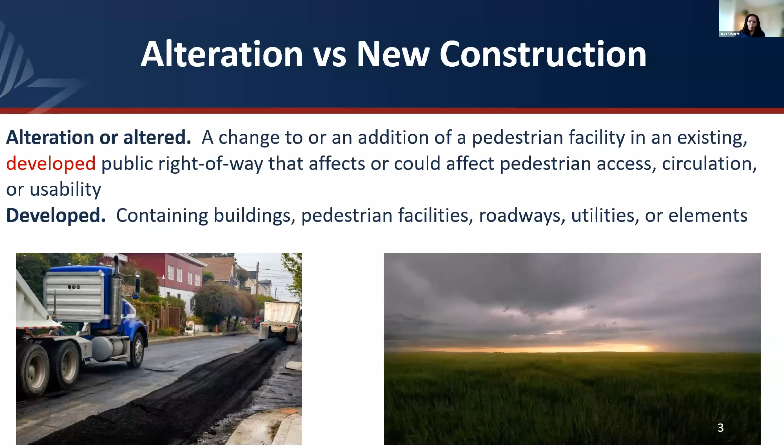Another change you'll notice is in the provision we used to term equivalent facilitation. Equivalent facilitation is still allowed for Title II or Title III entities, but we split it into two sub-provisions. The reason is it depends on whether you're doing work for an ADA covered facility, like towns, counties, and states, which are Title II agencies covered under the Americans with Disabilities Act, versus work on a federal site, which is covered by the Architectural Barriers Act. These two sub-provisions point out what you need to do if you must deviate from these requirements. Under the ADA, use of alternative designs, products, or technologies that result in substantially equivalent or greater accessibility and usability than the proposed guidelines is permitted.

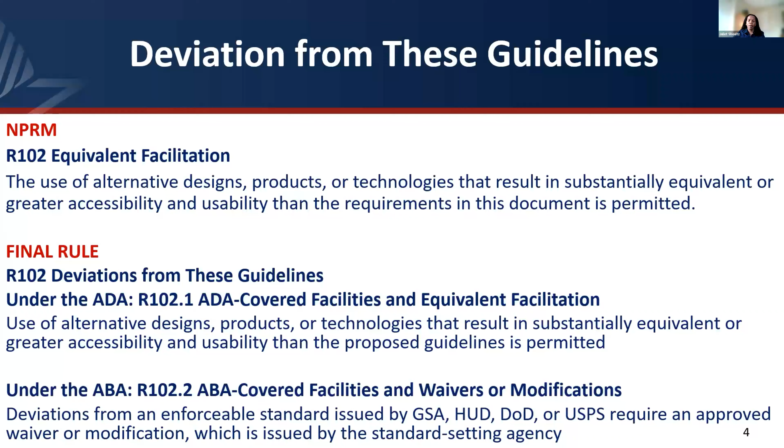We don't have a process in place for you to identify why you are deviating from these guidelines. Now, if you're working at a facility, say a military base under the Architectural Barriers Act, and you needed to deviate, you'd need to get an approved waiver or modification issued by the standard setting agency. So if you're working on a military base, for example, you'd have to reach out to the Department of Defense to get a waiver or modification to deviate from the guidelines. That's really the difference—deviation is still recognized, and sometimes you might have to do that, but the process works differently.

The other key change is that we got rid of right-of-way availability as an example of existing physical constraints. In the NPRM, that provision had a listing of examples of physical constraints, and right-of-way availability was one of them. But we found that was really confusing because right-of-way availability was interpreted in multiple different ways by users—one being whether there's no land at all, like a tight urban space where the sidewalk abuts the building and can't be widened, or whether it means you need to get an easement or something along those lines. Because on a lot of projects you can get an easement or acquire the right-of-way, we decided to remove that as an example, so each project can be assessed based on its own parameters and availability.

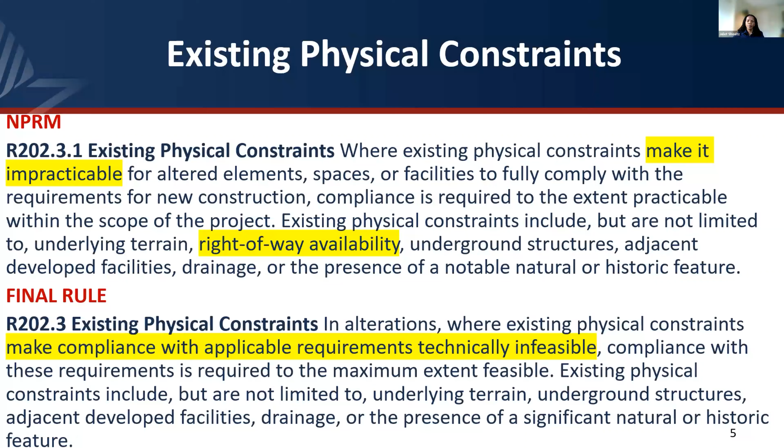So now we're going to go into some of the more technical requirements. In R202.2, we state that where pedestrian facilities are altered, they shall be connected by a pedestrian access route complying with R302. R302 is our technical requirements for a pedestrian access route, or PAR.

A transition segment may also be used to make this connection. An example of this is if you have a project where you're just redoing the curb ramp and landing, but not the rest of the sidewalk. This requires that when you redo that curb ramp and landing, you tie into the existing, which may not be compliant.

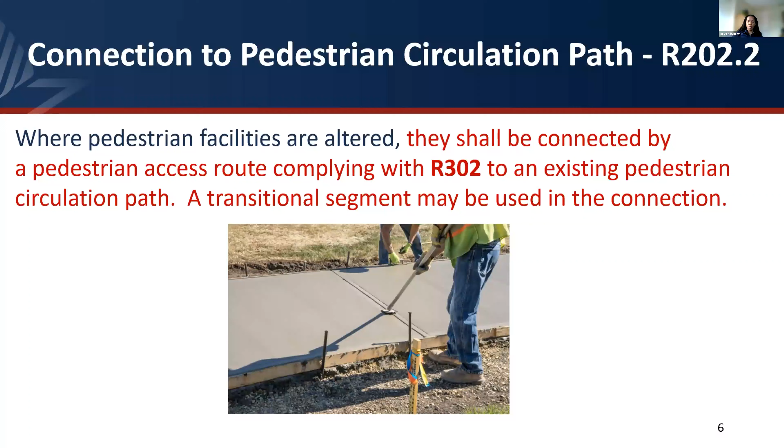But you tie in with a pedestrian access route or a transition segment. Another thing you'll notice in the final rule is we used to have transitional segment as a provision. What we've done now is we've defined transitional segment, and then we use the language within the rule text. But the concept of a transitional segment has not changed.

I mentioned R302 includes the technical requirements for a pedestrian access route, or PAR. So we'll look at some of them. I won't address all of them, but I just want to point out the ones where we revised for clarity or we changed the requirement substantively.

First thing is continuous clear width. This requirement didn't change, but we just wanted to make clear that when we say 48 inches minimum, that excludes the width of any curb. So you can see in this image, I'm showing the width of the pedestrian access route, but that doesn't include the width of the curb. So you want to make sure you have 48 inches exclusive of that curb width.

The 48 inches is the minimum pedestrian access route width, unless you are in medians and pedestrian refuge islands, where we require 60 inches minimum. Where you have shared use paths crossing medians and pedestrian refuge islands, the requirement is 60 inches minimum, or at least as wide as the crosswalk, whichever is greater. Keep in mind, on a shared use path, PROWAG still doesn't tell you how wide your shared use path must be, but the entire width of pedestrian circulation must be accessible.

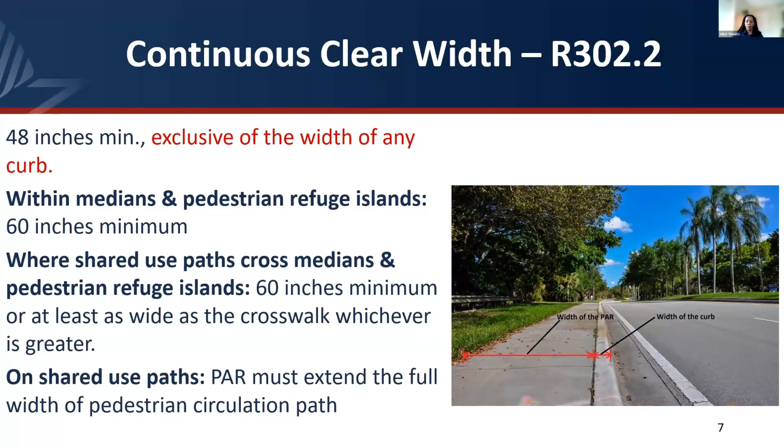The grade of the pedestrian access route within the highway right-of-way - that requirement hasn't changed, but we wanted to clarify what that means. On this picture, I'm showing a roadway that has a pretty steep grade, probably well over 5%. What we are requiring, consistent with the draft rule, is that the sidewalk within that right-of-way can match the grade of the road.

What we do clarify is that just because that sidewalk happens to exceed 5%, that does not make it a ramp requiring the ramp requirements - handrail, edge protection, and all that. So the sidewalk adjacent to a steep roadway is allowed to exceed 5%, but that does not then make it a ramp.

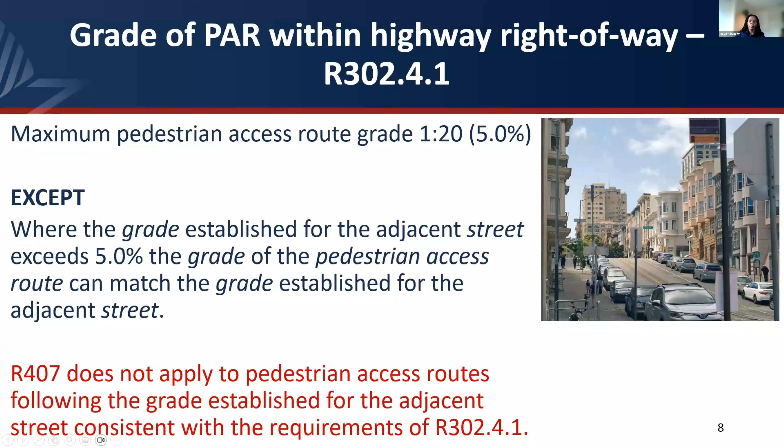We also added an exception. The grade of a pedestrian access route within a crosswalk, measured in the direction of travel, is 5% maximum, except where your roadway design requires super elevation, which would make that crosswalk greater than 5% if it's located where you have that super elevation. So the grade of the pedestrian access route within the crosswalk would be allowed to be the same as the super elevation.

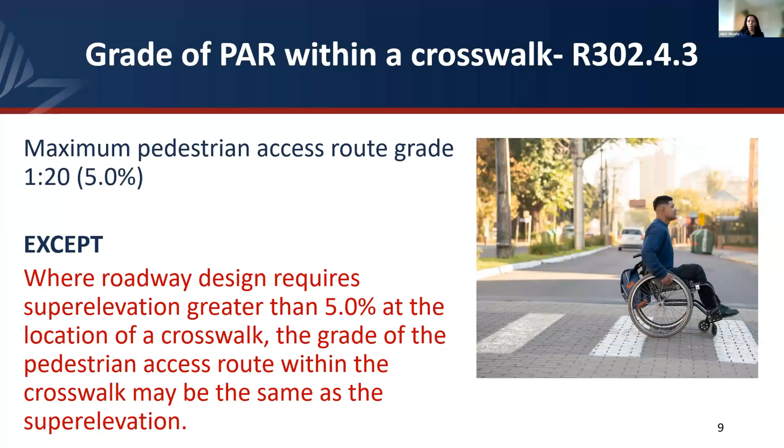The cross slope of a pedestrian access route not contained within a crosswalk, measured perpendicular to the direction of travel, is 2.1% maximum. You'll notice we have 2.1% in the final rule text. We're presenting slopes in both ratios and percentages - in this case, 1 in 48, and 2.1%, which is the equivalent. We did that in part to be consistent with ADAAG, where slopes are represented as ratios. So for consistency, we did the same in PROWAG, presenting them as ratios with their equivalent percentage.

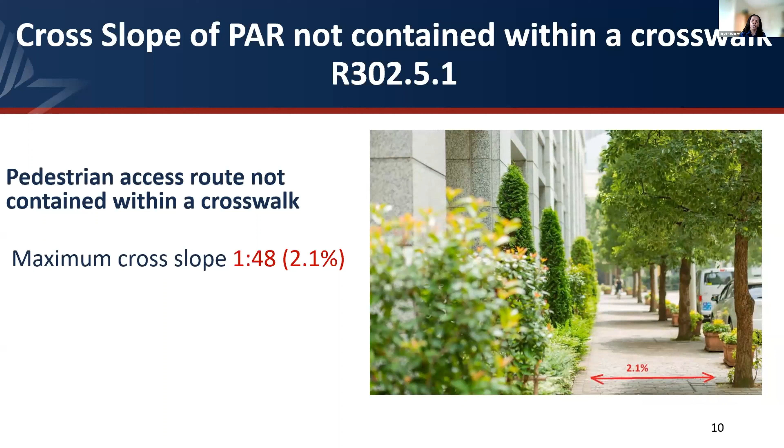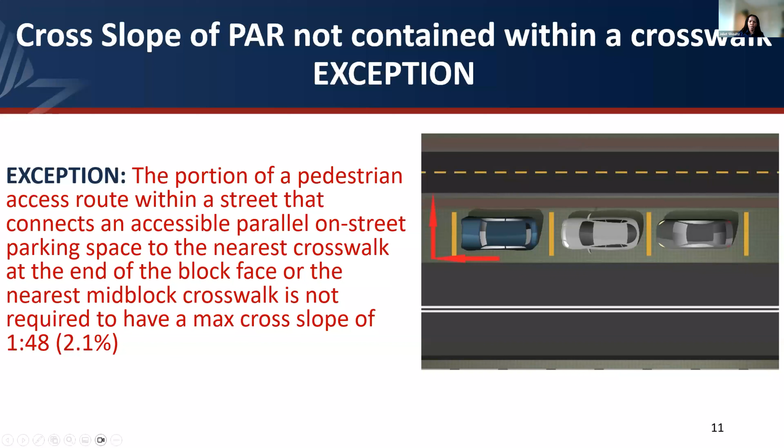Keep these in mind when you're looking at your curb ramps, because the curb ramps that are adjoined to these crosswalks also get allowed the same cross slope. So for example, if you have a mid-block curb ramp with a mid-block crosswalk adjoined to it, that mid-block crosswalk is allowed to have a cross slope that matches the grade of the street, and so the curb ramp as well would be allowed the same cross slope.

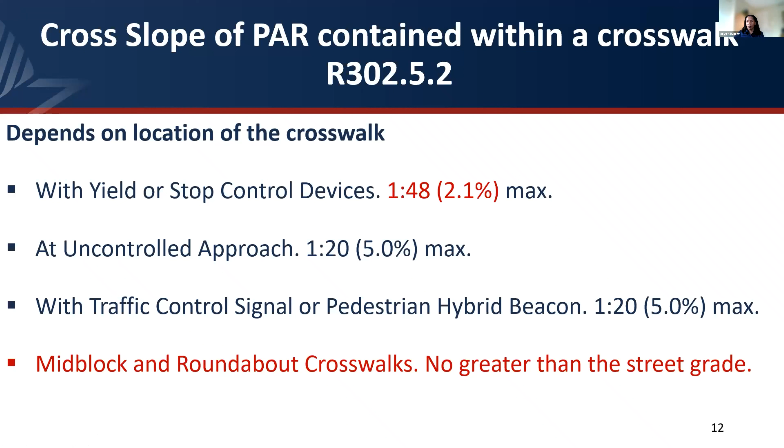Grade breaks must be flush. That's still the same requirement as we had in the draft rule text. One thing we changed is the terminology for what we used to refer to as vertical surface discontinuities. In the draft text, we had that language. We've now changed it to changes in level. It means the exact same thing, but this is another case where we wanted to be consistent with ADAAG, and ADAAG uses the language changes in level. So same requirement, it's just we changed the terminology.

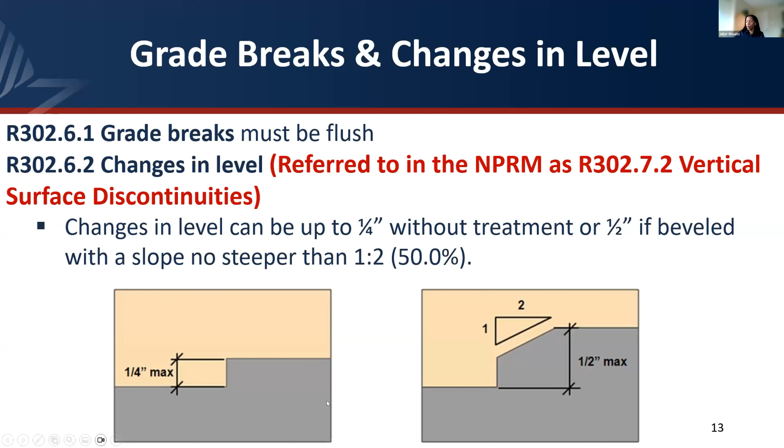Changes in level can be up to 1/4 inch with no treatment required, or up to 1/2 inch if they're beveled with a slope no steeper than 1 in 2, or 50%. Changes in level greater than 1/2 inch up to 6 inches must have a slope no greater than 1 in 12, or 8.3%. Now, if your change in level is greater than 6 inches, you're looking at a ramp, and you need to comply with the ramp requirements, which are in R407.

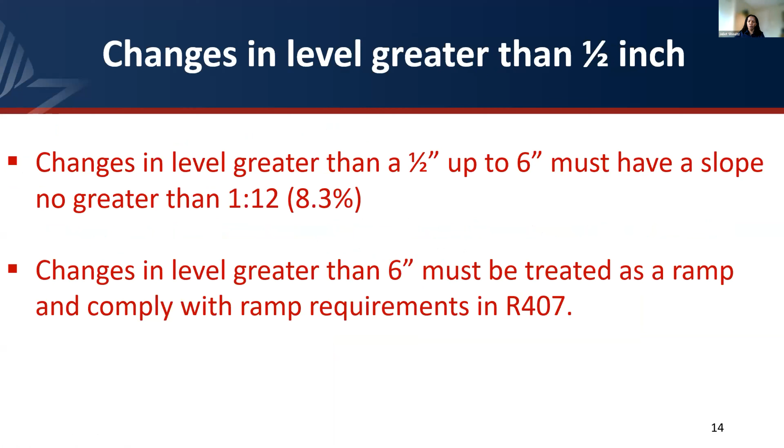In 309.1.3.2, we talk about connecting boarding and alighting areas and boarding platforms to existing pedestrian circulation paths. In alterations, boarding and alighting areas and boarding platforms need to be connected to existing pedestrian circulation paths by pedestrian access routes complying with R302. Remember, R302 gives you the technical requirements for a pedestrian access route. So what this looks like, for example, is if you add a bus stop and maybe you put it in the middle of the block somewhere, and you don't have a sidewalk that gets you all the way to the bus stop, so it's not connected to the intersection. Maybe the sidewalk starts at the intersection and comes up short of mid-block.

So this requirement applies when you have an alteration - you've either altered the bus stop or added a new bus stop. What this requires is that you provide a pedestrian access route that connects to the existing pedestrian circulation path. It's not telling you that you need to reconstruct the existing sidewalk if it's not accessible. What it's saying is that when you add or modify that bus stop, the boarding and alighting areas or boarding platform need to be connected to the existing pedestrian circulation path, existing sidewalk, by a pedestrian access route.

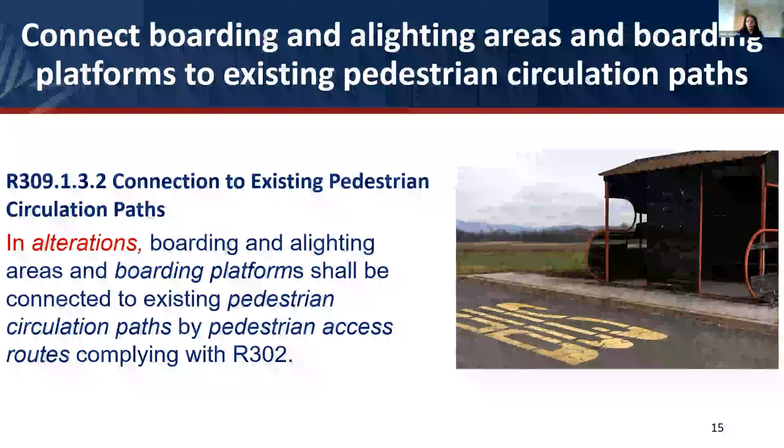We have a requirement for alternate passenger loading zones, and this was really more of a clarification: where permanently designated passenger loading zones are temporarily not accessible due to construction, maintenance, or other similar conditions, and you provide a temporary passenger loading zone, that temporary passenger loading zone needs to be accessible. In other words, meet the requirements that are in R311.

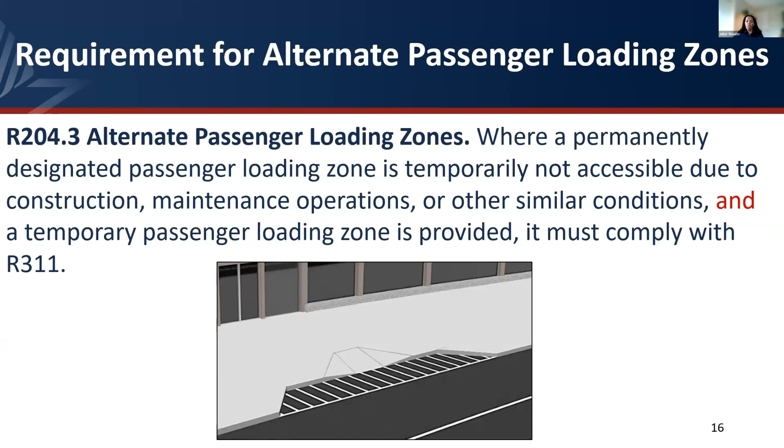For alternate transit stops, where accessible transit stops are temporarily not accessible due to construction, maintenance, operations, or other similar conditions, alternate transit stops complying with R309, the technical requirements for transit stops, must be provided. So again, you have a bus boarding and alighting area at a bus stop that is accessible, and you have to close it down for whatever reason, maintenance, reconstruction. The requirement is you provide an alternate transit stop that's also accessible.

There's different ways in which this could look. If it's at an intersection, maybe it makes sense to just make the alternate transit stop one of the accessible ones across the street, if it makes sense for the way the bus route works. But the key thing here is if you are making an accessible transit stop temporarily unavailable, you need to make sure you provide an alternate transit stop that's also accessible.

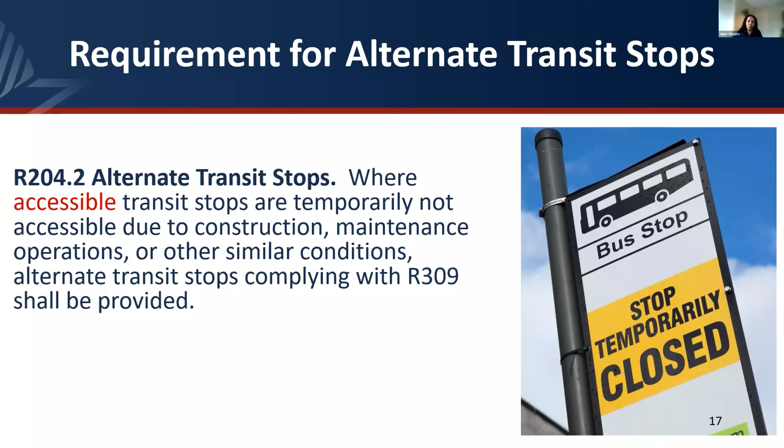So now we'll talk about alternate pedestrian access routes, which you'll have a lot of if you're doing alteration projects and closing up pedestrian circulation paths. When a pedestrian circulation path is temporarily not accessible due to construction, maintenance, closure, or other similar conditions, what we require is an alternate pedestrian access route be provided, consistent with R303, and R303 is going to spell out all the requirements for an alternate pedestrian access route.

There is an exception if establishing or maintaining an alternate pedestrian access route is technically infeasible due to site conditions or existing physical constraints. An alternate means of providing access for pedestrians with disabilities shall be permitted. So you might need an alternate means if, let's say, you are redoing a pedestrian bridge or something along those lines. The key thing to remember is this alternate means really needs to provide equivalent facilitation.

It shouldn't be a shuttle that someone has to call when they get on the site. It really needs to have the same level of use as someone who maybe can take the stairs as an alternate route. So you need to really think through if you are providing an alternate means for pedestrians to get around that construction.

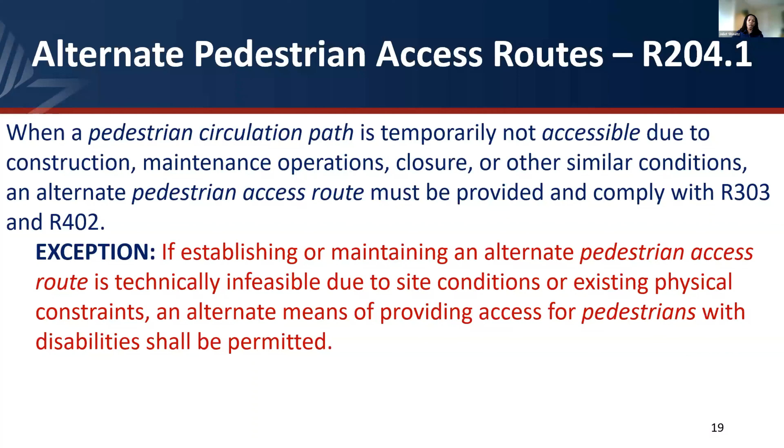I mentioned R303 has all the requirements for alternate pedestrian access routes. In the draft rule text, we refer to MUTCD, and you'll find that a lot of these requirements are pretty consistent to what we were referencing in the MUTCD.

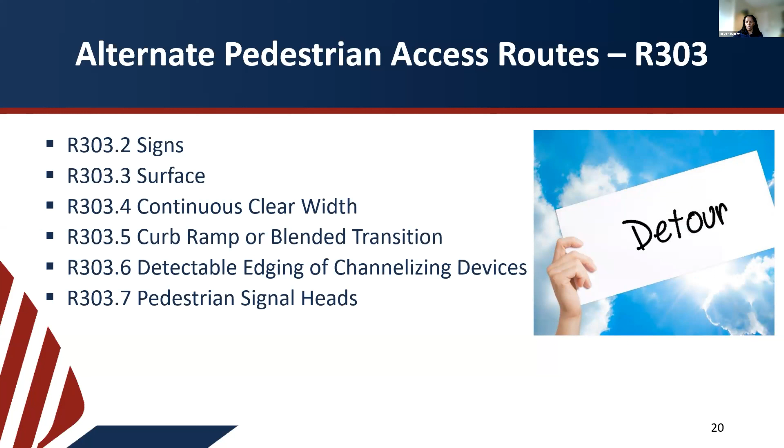First, with signs, you need to have signs identifying the alternate pedestrian access routes, and they need to be provided in advance of decision points and comply with R410. R410 gives us the requirements for accessible signs. One thing to keep in mind is proximity actuated audible signs or other non-visual means within the public right-of-way of conveying the information that identifies the alternate pedestrian access route must also be provided.

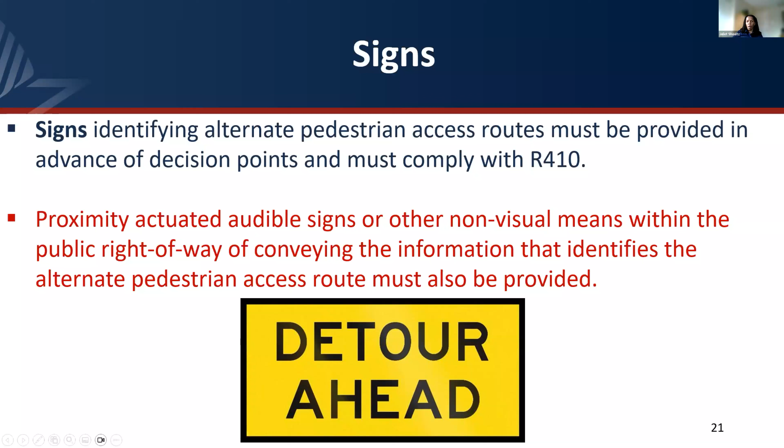So basically, you need to provide signage if you're providing an alternate pedestrian access route, but that signage needs to be accessible. So if it's just a sign, for example, as you see here on the slide, someone with no vision or low vision doesn't know that there is a sign there. And that's where the requirement for proximity actuated audible signs or other non-visual means comes in.

So the alternate pedestrian access route, what's required to make sure that it meets PROWAG requirements? Surfaces must comply with R302.6. Remember, R302.6 addresses pedestrian access routes, so we're talking your grade breaks, changes in level, horizontal openings, and so on. Or that alternate pedestrian access route needs to be no less accessible than the surface of the temporarily closed pedestrian circulation path. And this is consistent with what we were referencing in MUTCD in the draft rule text.

The continuous clear width of that alternate pedestrian access route should be 48 inches minimum, again, exclusive of the width of any curb. There is an exception where the alternate pedestrian access route utilizes an existing pedestrian circulation path: the width must be no less than the width of the temporarily closed pedestrian circulation path.

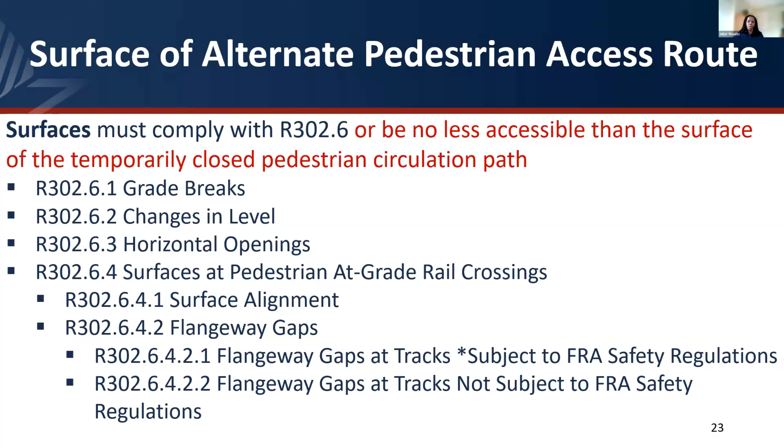So I want to talk about this exception where you're allowed to have the width no less than the width of the temporarily closed pedestrian circulation path. And also on the previous slide where I said the alternate pedestrian access route must comply with R302.6, or be no less accessible than the surface of the temporarily closed pedestrian circulation path. What this looks like is, for example, if you're replacing sidewalk on both sides of a street, one block, for example, and on both sides the sidewalk is deteriorated, and maybe on both sides it's less than 48 inches.

Maybe it's that 36-inch wide sidewalk. This allows you to detour, you can have your alternate pedestrian access route on the sidewalk across the street, even though it's not fully compliant. It's not 48 inches wide, but it's at least as accessible as what you're closing off. That way you can redo one side of the road, redo that sidewalk, and detour to the other side, which is no less accessible than what's closed off. So that's really what that allows you to do, which is consistent with what we reference in MUTCD.

You do need to keep in mind that where the alternate pedestrian access route crosses a curb, you have to provide a curb ramp or blended transition. So if you were missing curb ramps across the street, those you do have to provide.

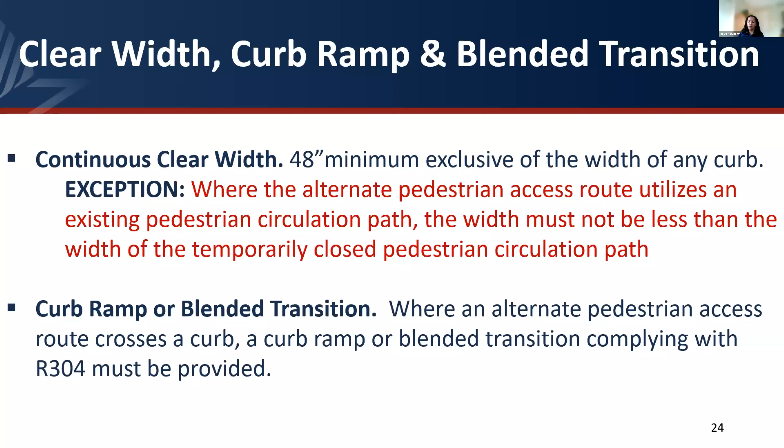Where a channelizing device is used to delineate an alternate pedestrian access route, it needs continuous detectable edging throughout the entire length of the route. Of course, there is an exception for where construction vehicles are coming in and out of the construction zone, or where vehicles turn. In those areas, you can have a gap in that detectable edging, but other than that, you need to have it continuously throughout the length of that accessible route.

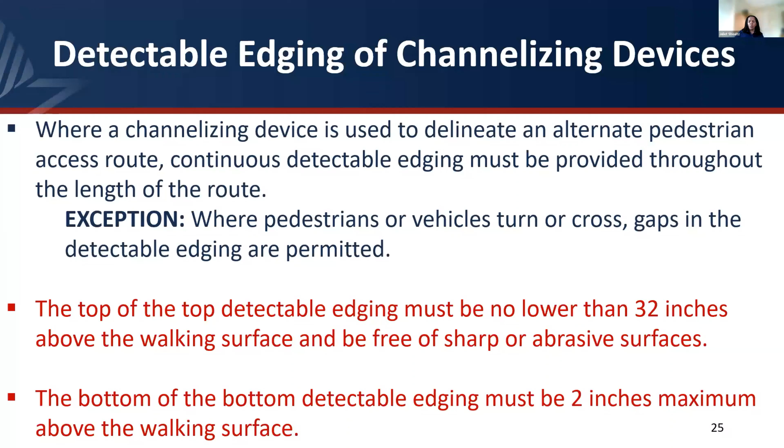We also included the technical requirements for detectable edging, again from MUTCD, so these will look familiar to you if you're familiar with the MUTCD. The top of the detectable edging must be no lower than 32 inches above the walking surface and be free of sharp or abrasive surfaces. The bottom of the detectable edging must be 2 inches maximum above the walking surface.

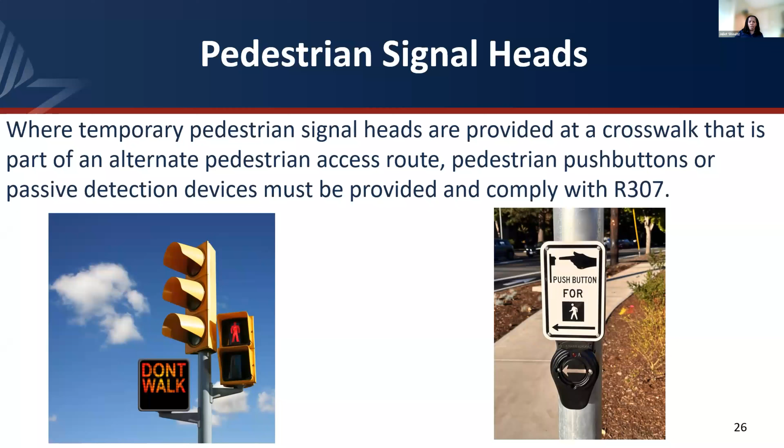Where temporary pedestrian signal heads are provided on the alternate pedestrian access route, for example at a crosswalk, they need to be accessible. So your pedestrian push buttons, your passive detection devices, any temporary pedestrian signal heads you're providing on that alternate pedestrian access route need to be accessible. In other words, comply with R307.

Which leads us to the next section where we're going to talk about pedestrian push buttons, passive pedestrian detection, and accessible pedestrian signal walk indications. So where provided, pedestrian signal heads and pedestrian activated warning devices, such as rectangular rapid flashing beacons, must comply with R206. So this is your scoping.

The accessible features required by these guidelines must be available at all times. So where you have traffic control signals and hybrid beacons with PED signal heads, you need to have walk indication that's compliant with R308. Pedestrian signals must have a pedestrian push button that's compliant with the requirements, or passive detection or pre-timed operation that activates both the audible and vibrotactile indications.

If you have pedestrian activated warning devices like rectangular rapid flashing beacons, same thing, you need to have either pedestrian push buttons that are compliant or passive detection that operates audible indications.

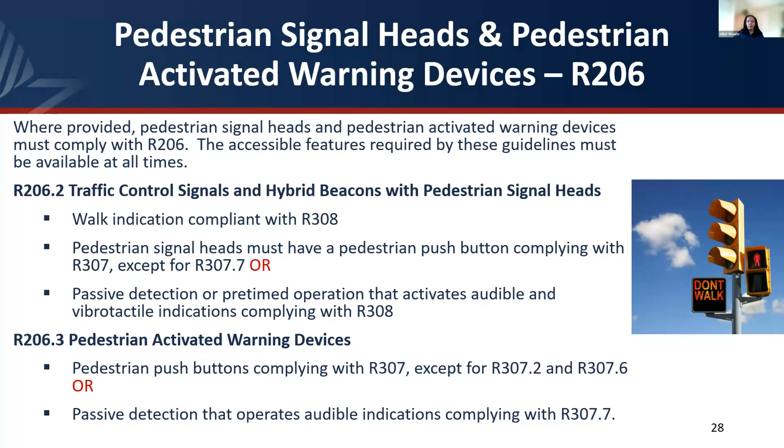Push button operations, operable parts must be compliant with Chapter 4. The PED push buttons, or if you're using passive detection devices, they need to activate accessible pedestrian signals and, where applicable, the walk interval. If you have extended push button press, we do have some requirements.

A push button press of less than a second activates only the PED timing and any associated accessible walk indications. A push button press greater than a second must actuate the PED timing, any associated accessible walk indications, and any other additional features that you might provide.

If additional crossing time is provided by means of an extended push button press, you need to have a sign mounted adjacent to or integral to the pedestrian push button indicating that you do have these additional features.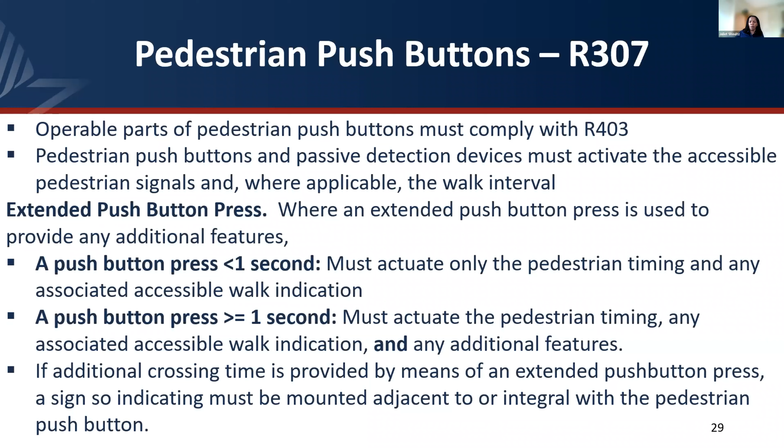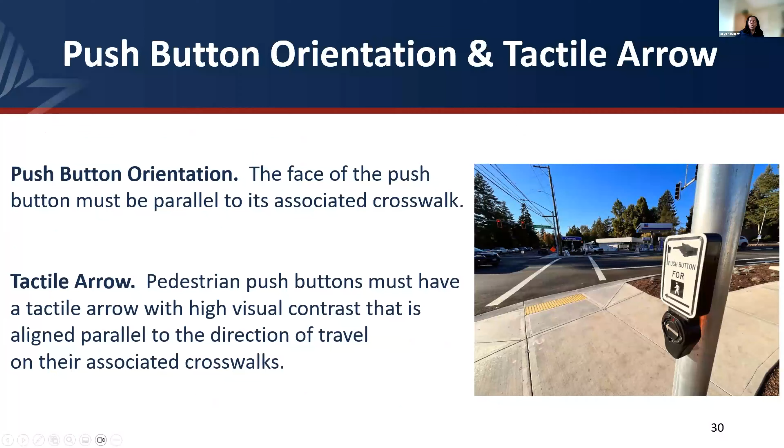Push button should be oriented parallel to the associated crosswalk, as you can see in this picture here. PED push buttons must have a tactile arrow with high visual contrast, so you can see the light on dark, dark on light with a tactile arrow. And it too must be aligned parallel to the direction of travel of the associated crosswalk.

The PED push buttons must be operable with one hand and shouldn't require grasping, pinching, or twisting of the wrist, and shouldn't require more than 5-pound force to operate.

You need to provide a clear space that's at least 30 by 48. We did make some clarifications on the clear space, so the maximum clear space slope is 1 in 48, or 2.1%, in both directions. Now, remember I talked about the cross slope requirements at the crosswalk and how those would also apply to the adjoining curb ramps.

So we have an exception here. The slope may be consistent with the slope of the adjacent pedestrian access route if that adjacent pedestrian access route conforms to the requirements of R302.4. And again, R302.4 gave you those cross slope requirements at crosswalks, depending on whether it was at a yield and stop controlled or stop controlled intersection, or signalized, or mid-block.

So you get that exception there. They may be positioned, that clear space can be positioned for either a forward or parallel approach. But we made sure to clarify this, since we got a lot of technical assistance questions on it: clear spaces should not be located on curb ramp runs or flares.

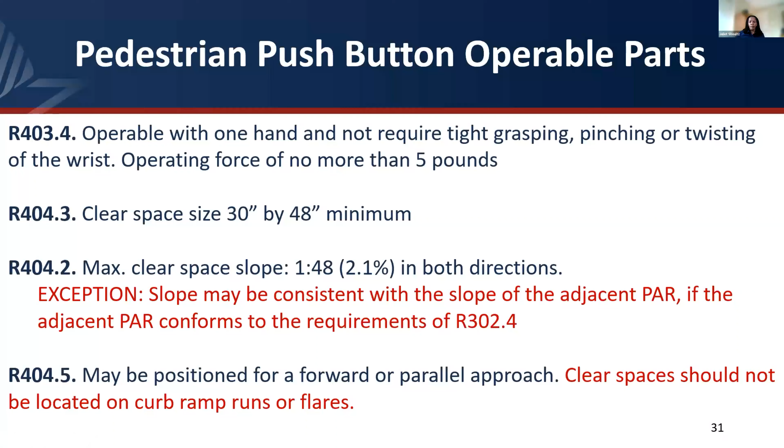Where two pedestrian push buttons are provided on the same corner, they must be separated by 10 feet. There is an exception in alterations where it's technically infeasible to provide that 10-foot separation. So where that's the case, a pedestrian push button information message must be provided.

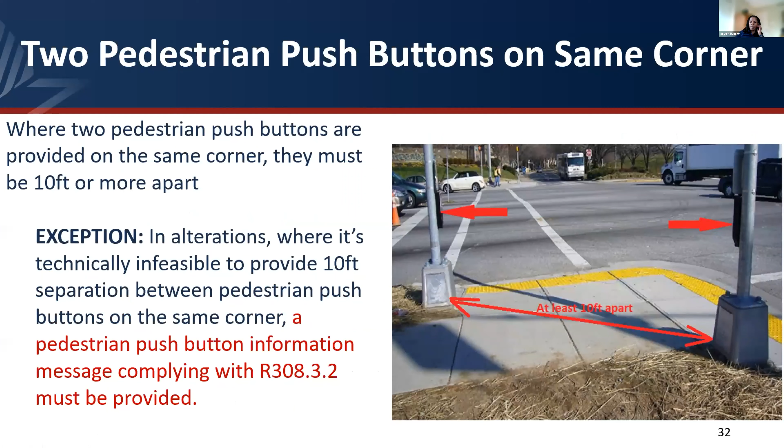Let's talk about the speech information message when the walk interval is not timing. So where your speech push button information messages are made available, either on pre-timed signals or by actuating them, the accessible pedestrian push button or the passive detection device must only be actuated when the walk interval is not timing. And they need to begin with, again consistent with MUTCD, the term 'wait,' followed by the intersection identification, for example, 'wait to cross Broadway at Grand.'

If information on intersection signalization or geometry is also provided, it needs to come after the speech information, for example, 'wait to cross Broadway at Grand.' So the additional information would come after that.

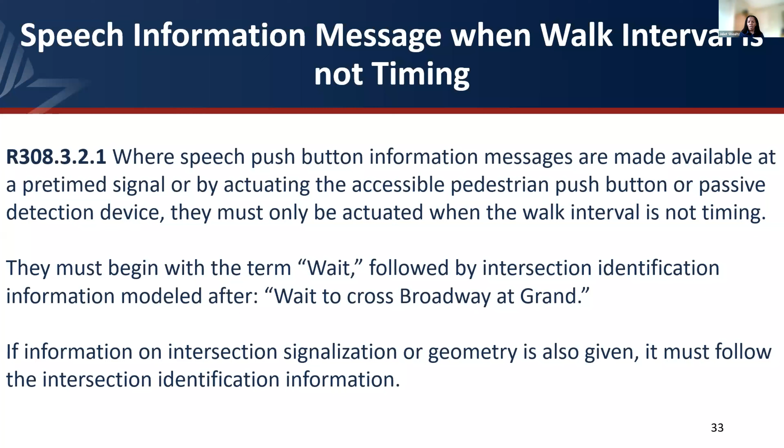Then we have speech walk messages that are used at intersections having pedestrian phasing that is concurrent with vehicular phasing, and again, all of this is consistent with MUTCD. It would be modeled after, 'walk sign is on to cross Broadway.' If you have speech walk messages used at intersections that have exclusive pedestrian phasing, those need to be modeled after, 'walk sign is on for all crossings.'

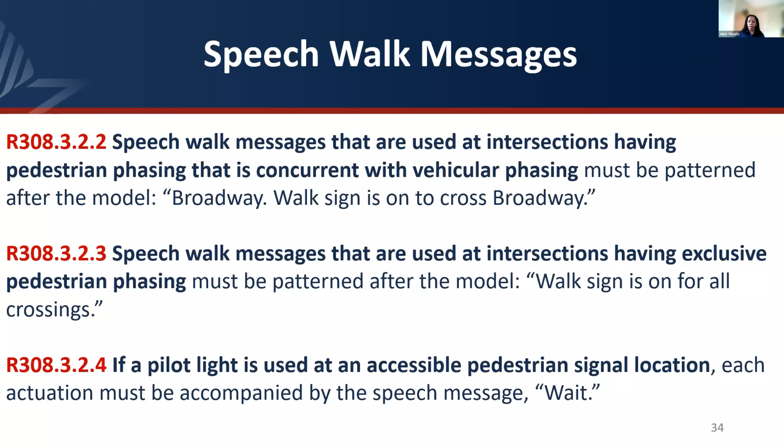If you provide a pilot light at an accessible pedestrian signal location, each actuation needs to be accompanied by the speech message 'wait.' So that allows for that audible function, or audible information, that someone who's blind will not be able to have with just a pilot light that doesn't provide any audible feedback.

Where your accessible pedestrian signal is provided at a single crossing, or where you have two accessible pedestrian signals that are 10 feet or greater from each other at a corner, the audible walk indication must be a percussive tone. Remember, when they were less than 10 feet apart, we just talked about the speech information message and what that should look like, so that someone has clear information about which button they're pressing and which crosswalk access it's going to give them. But when the accessible pedestrian signals are 10 feet or greater at the corner, the audible walk indication needs to be a percussive tone. We have technical requirements for how that should work in terms of how often it should repeat. We also have information on volume, and all that is consistent with MUTCD.

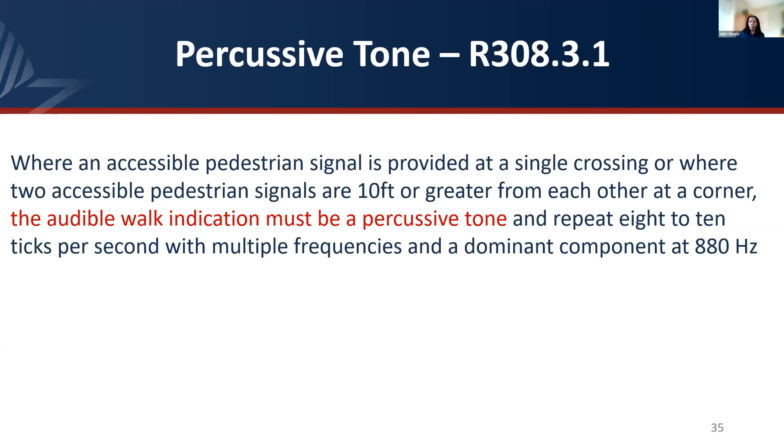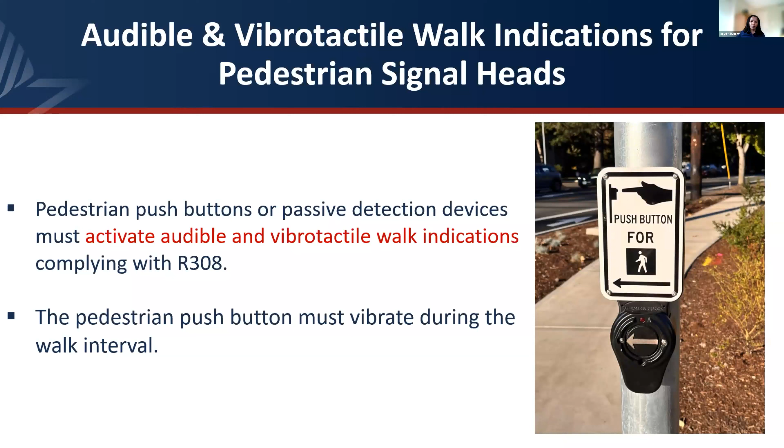Pedestrian push buttons or passive detection devices need to activate both the audible and vibrotactile walk indications, and the pedestrian push button needs to vibrate during that walk interval. Okay, so that's where you have walk indications for pedestrians, where you're providing pedestrian signal heads.

Where pedestrian push button or passive detection is provided for pedestrian activated warning devices, such as rectangular rapid flashing beacons, the ped push button or passive detection device needs to activate a speech message that indicates the status of the beacon instead of the audible walk indication.

This is important because what we want is to make sure people who are low vision or blind are getting the exact same information as people who are sighted. So at an RRFB, you don't get the information that it is now safe to walk. You don't get a green light that tells you that you can now walk. You're really just getting the information to the vehicles that these pedestrians are about to get into the crosswalk, so the speech message that either the push button or passive detection device gives needs to indicate the status of the beacon instead of an audible walk indication.

Where a pedestrian push button is provided, it should not include vibrotactile features indicating a walk interval. Again, at an intersection where there's a walk interval, you want the information telling the pedestrian to walk, the audible information, and the ped push button vibrotactile function should be working during the walk interval. But where you have pedestrian activated warning devices, you don't want that vibrotactile feature working, because that's not truly a walk interval. It's giving the drivers information about pedestrians possibly coming into the crosswalk, not giving pedestrians information that it is now safe for you to walk.

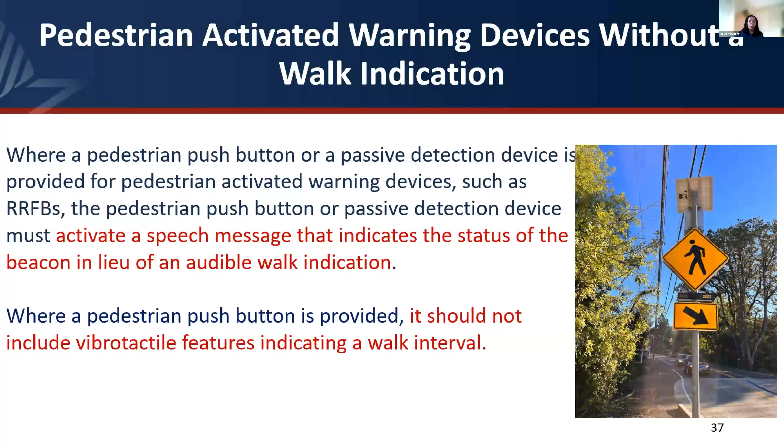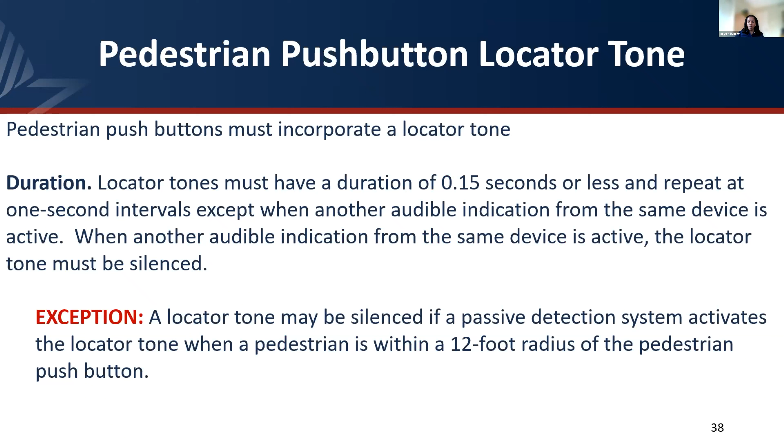Pedestrian push buttons must incorporate a locator tone, and it needs to be active the entire time. The duration is consistent with MUTCD. There is an exception, of course: a locator tone may be silenced if a passive detection system activates the locator tone, but it needs to be activated when a pedestrian is within a 12-foot radius of that ped push button.

This is an area where we deviate from the MUTCD. When the traffic control signal is operating in flashing mode, the pedestrian push button locator tones must remain active, and the pedestrian push button must activate a speech message that communicates the operating mode of the traffic control signal. Again, most everything we've been consistent with what we were referencing in the MUTCD, but this is an area where we felt it was important that when someone who's blind or has low vision approaches an intersection where the traffic control is in flashing mode, that they have the same information a sighted pedestrian would have.

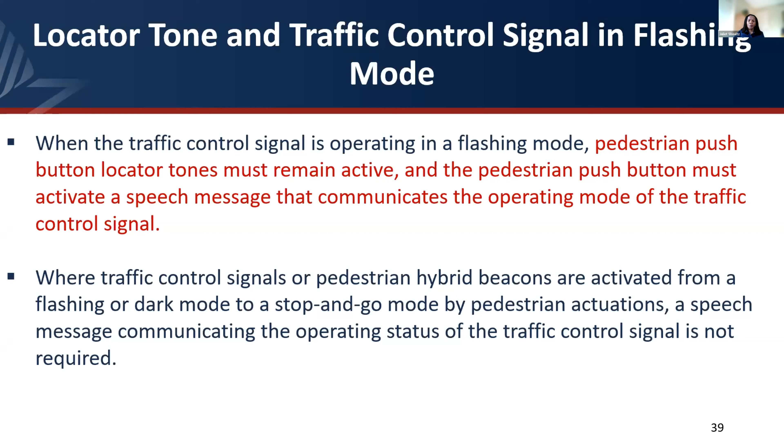We did remove this provision from the rule text. In the NPRM, we had alterations: existing pedestrian signals shall comply with R209.1 when the signal controller and software are altered or the signal head is replaced. So we were stating that if you do any of those things, then the existing pedestrian signal needs to then be an accessible pedestrian signal.

APS during alterations will be determined according to the requirements in the guidelines as adopted by the enforcing agencies. So once the enforcing agencies adopt, they will provide some guidance on what alterations would trigger the requirement to make sure you have accessible pedestrian signals.

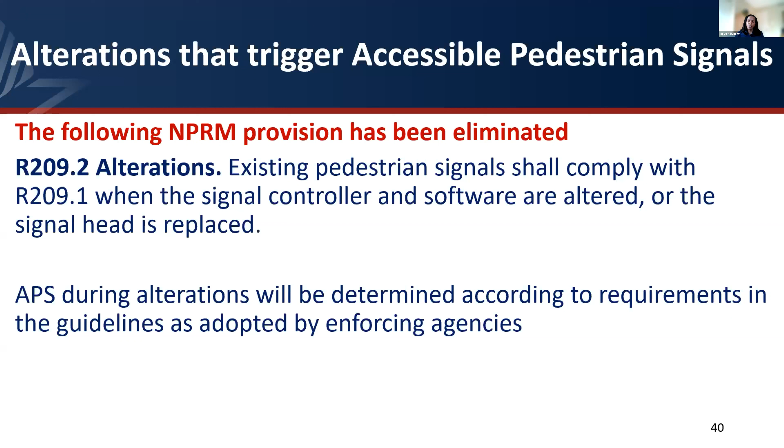Let's switch to curb ramps and crosswalks. Again, just talking about the changes, not all the technical requirements for curb ramps and crosswalks.

We clarified when a change in direction is required at a perpendicular curb ramp, when a landing is required. We did get a lot of TA questions where we had designers having perpendicular curb ramps and a landing. Based on the way we'd written the text, it kind of led you in that direction. But that landing is really only required when a change in direction is necessary. So on this slide, you have a perpendicular curb ramp, and then you have a landing because you have two ways you can go - you can turn left or right. So you need that landing as kind of a turning space to orient either to continue on the sidewalk or to get from the sidewalk to the curb ramp.

If you didn't have a change in direction, so the curb ramp and the sidewalk just continues in one direction, you wouldn't need a landing at the top of that curb ramp. So we wanted to make sure we clarified that. It needs to be 48 by 48 inches wide. And another thing, for consistency with ADAAG, you will not see the terminology of turning space, which we used in draft rule text - we've replaced that with landing. It's essentially the same thing, but just for consistency with ADAAG, we wanted to make sure we're using the same terminology. So what used to be turning spaces are now referred to as landings.

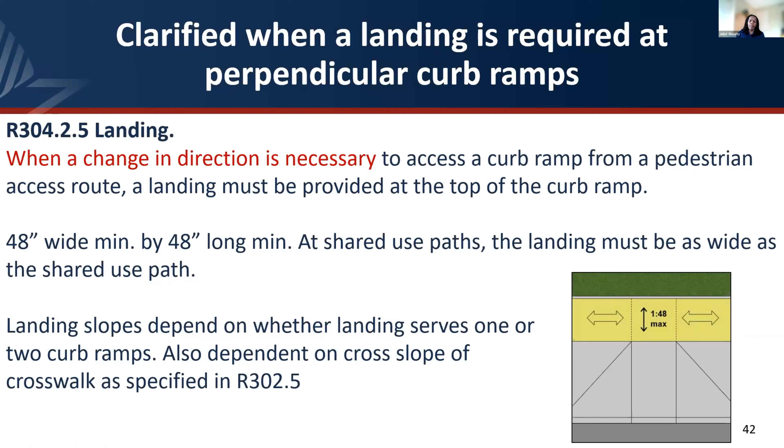In the draft rule text, under common requirements for curb ramps and blended transitions, we had this clear space requirement: beyond the bottom grade break, a clear space should be provided within the width of the pedestrian street crossing and wholly outside the parallel vehicular travel lane. In the final rule, we've clarified that clear space is really only required at perpendicular curb ramps, because when you think about parallel curb ramps, you do have that clear area, which would be the landing at the bottom of the parallel curb ramp. So again, that clear space is only required at perpendicular curb ramps.

And we have added explicit technical requirements for that clear area, which we didn't have in the draft rule. We've specified that it must be at least 48 by 48, unless it's at a shared use path, in which case it needs to be as wide as the shared use path. It still needs to be located wholly outside the vehicle travel lanes, and we've clarified that includes bike lanes, and those are the lanes running parallel to the crosswalk.

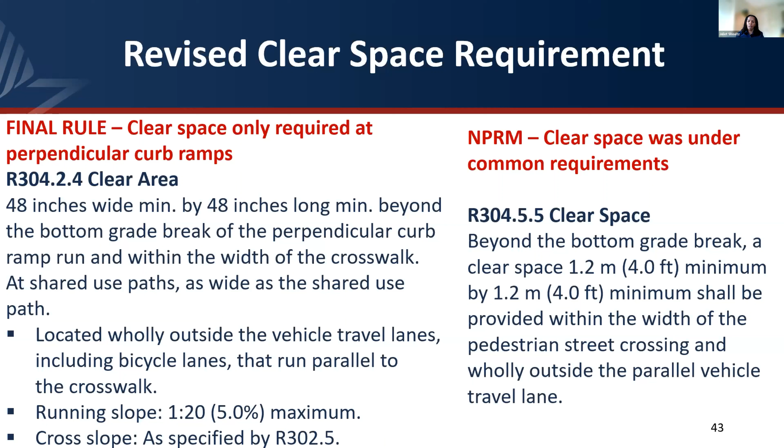The running slope is 5% maximum, cross slope as specified in R302.5. Remember, that cross slope and the crosswalk - if the crosswalk is allowed to have a 5% cross slope, then the clear space would also get that 5% cross slope allowance.

We've clarified that at a blended transition serving more than one pedestrian circulation path, where the running slope is greater than 2.1%, a pedestrian access route must be provided so that a pedestrian who's not crossing the street, just continuing around the corner, has a pedestrian access route to bypass this blended transition.

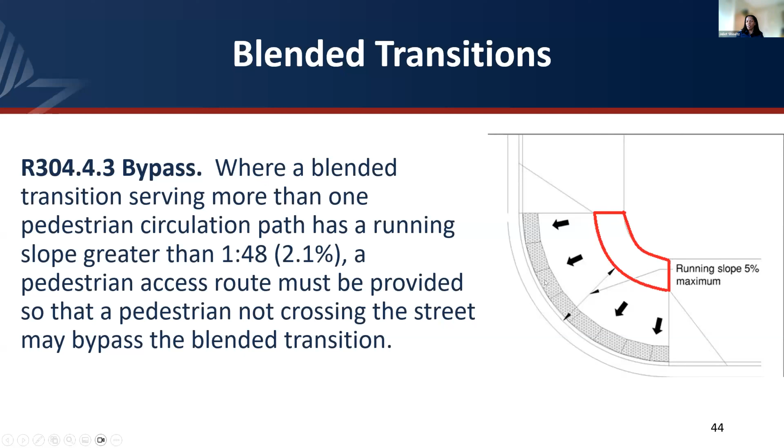We clarified requirements for crosswalks at intersections, mid-block, and roundabouts, and where curb ramps are required or a blended transition. So at an intersection, one curb ramp or blended transition must be provided for each crosswalk, or a single blended transition that spans all the crosswalks at the intersection corner.

I do want to point out that we defined crosswalk. It was important to do that because there was a lot of confusion surrounding what a crosswalk is. There was some misinterpretation that if the pavement isn't marked for a crosswalk, then you don't have a crosswalk, which isn't technically correct. In our definition section, we defined crosswalk consistent with MUTCD, with a slight modification, maybe the last sentence, to clarify that pavement marking doesn't define the crosswalk. So even in the absence of crosswalk pavement marking, you still have a crosswalk if it meets that definition.

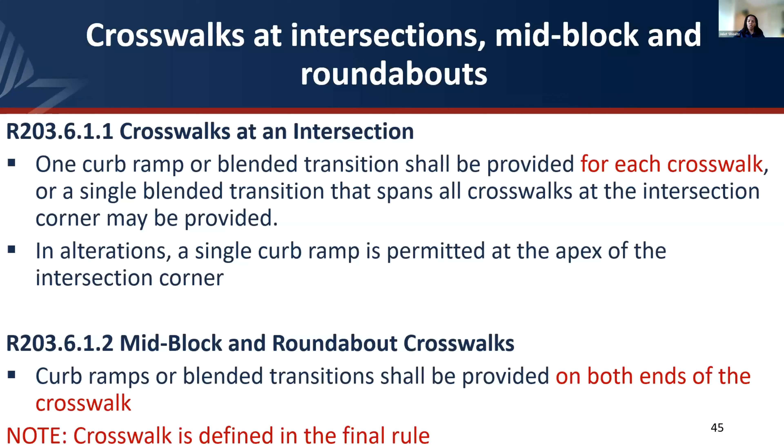In alterations, a single curb ramp is permitted at the apex of the intersection corner. At mid-block and roundabout crosswalks, again the same requirement applies: you need to have a curb ramp or blended transition at both ends of that crosswalk.

We also clarified, which was an area of confusion we got a lot of questions about, what happens when crossing is prohibited. You can't just design an intersection where there isn't a curb ramp on the other side and just say we really don't want people to go there. You have to be intentional about that design. So if by definition you have a crosswalk, but crossing is prohibited, you need to be intentional about how you design that, and there are two ways to do that.

You either need to separate the curb ramp or blended transition from the roadway with landscaping or other non-prepared surface, such as the picture on the left. You have sidewalk coming on both ends, but you do not want crossing across this main line at this intersection. In this picture, they've separated the roadway with landscaping - so either landscaping or other non-prepared surface.

The other option is vertical separation. What we require is something that is detectable, so it should be cane detectable, meaning the vertical edge treatment needs to have a bottom edge 15 inches maximum above the pedestrian circulation path. So those are the two options you have. It doesn't have to be landscaping, but it's got to be a non-prepared surface. It cannot be detectable warning surfaces - those really don't serve that purpose.

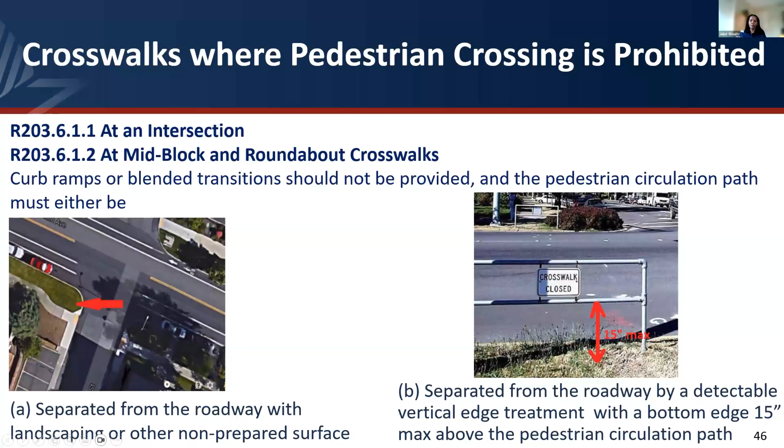We added some options for crosswalk treatments at roundabouts and channelized turn lanes. At roundabouts, each multi-lane segment of the roundabout containing a crosswalk must provide a crosswalk treatment consisting of one or more of the following: a traffic control signal with a PED signal head, a pedestrian hybrid beacon, a pedestrian actuated rectangular rapid flashing beacon, or a raised crossing.

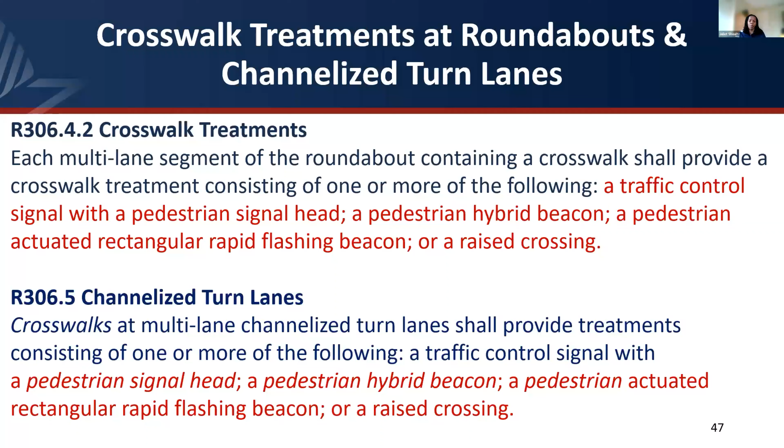And you get the same options where you have crosswalks at multi-lane channelized turn lanes - the same options for treatments: traffic control signal with pedestrian signal head, pedestrian hybrid beacon, pedestrian actuated rectangular rapid flashing beacon, or a raised crossing.

At roundabouts, we do require edge detection, and that's required on the street side edge of the pedestrian circulation path at the approach and along the circulatory roadway of the roundabout where crossing is not intended. In this image, they're using both separation with a non-prepared surface, and they're also using the vertical edge treatment - they didn't really need to do this at this roundabout specifically.

Where the pedestrian circulation path is not attached to the curb, just like this roundabout, landscaping or other non-prepared surface is required - that was sufficient, they didn't need the vertical edge treatment. Now, if you have a curb-attached pedestrian circulation path, then you need to provide vertical edge treatment. It needs to be continuous and detectable, and the bottom edge must be no more than 15 inches above the pedestrian circulation path.

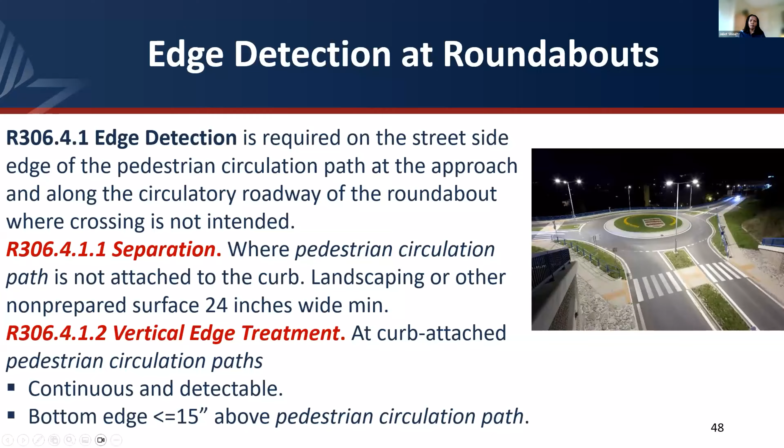And now we'll switch to parking and passenger loading zones, and I'll talk about the changes there. In terms of scoping, we still have the same requirements where on-street parking is provided, it is metered or designated by signs or pavement markings.

Accessible parking spaces are required. We clarified some exceptions. If you have on-street parking spaces that are designated exclusively as residential parking, those are not covered by PROWAG, so you don't have to include those in determining how many accessible spaces you need. If you have on-street parking spaces designated exclusively for commercial or law enforcement, again, you don't have to include those

in determining how many accessible parking spaces are required. And then the last exception we had in the draft rule text, where you alter the on-street parking spaces, the scoping requirements apply only to the affected parking spaces until you've met that minimum number of accessible on-street parking spaces that are required per table R211.

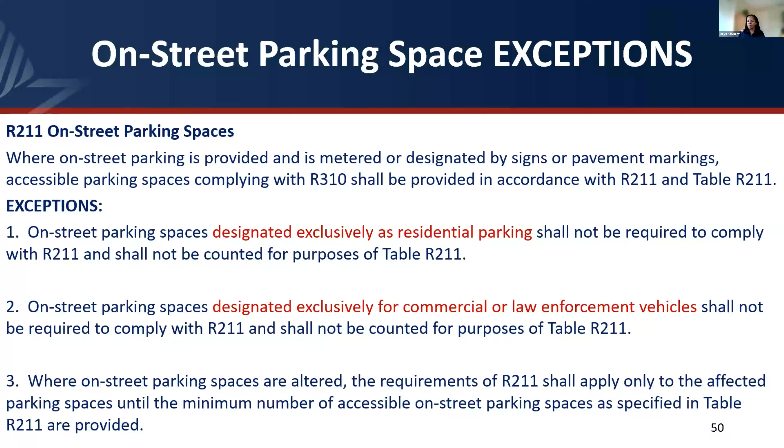One change you'll notice is we now specify the dimensions of on-street parallel parking spaces. And we say that they need to be at least 24 feet long by 13 feet wide. And of course, they should not encroach on the traveled way.

So we don't have what we were defining as the access aisle, but in the dimensions that we provide, we're still accounting for that access aisle. We're just not calling it that anymore. We are requiring this space with the specific dimensions. And if you can't provide a space with these dimensions, that's when you go to the option of providing it at the end of the block face or at mid-block where you have that crosswalk.

And in the NPRM, we'd only specify the dimensions of the access aisle. So the space for the access aisle still exists. It's just not clarified, it's not specified in final rule text. So you don't have to stripe 5 feet wide of that space to discourage parking in it.

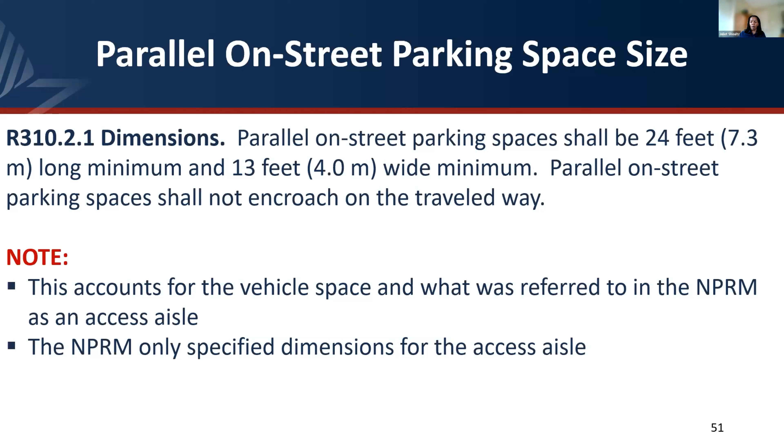One thing we found is people are getting ticketed for parking in the access aisle, but people with mobility disabilities use different devices, walkers, power wheelchairs, manual wheelchairs, and so they deploy out of their vehicles in different ways. And for some people, maybe they deploy on the driver's side, some deploy on the passenger side. So having this large space without the limitation of not being able to park in that access aisle because it's striped and marked as such to discourage parking allows for a user to make use of that space in the way that works best for them.

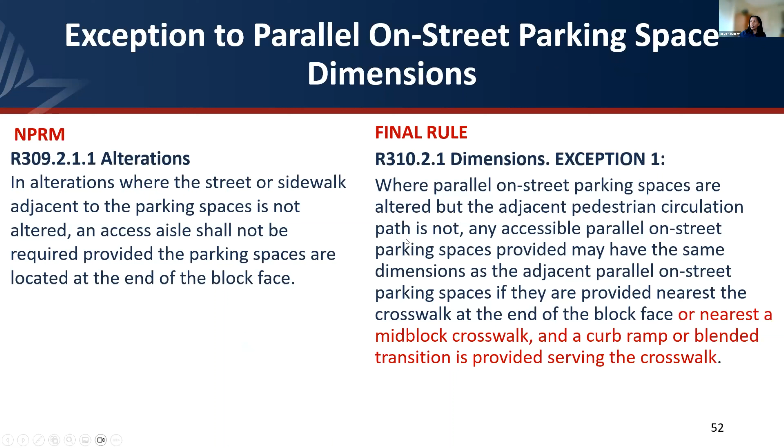Same exceptions that we had in the draft rule text, they're just stated a little differently. In the draft rule, we talked about alterations as a provision on its own, where the street or sidewalk adjacent to parking spaces is not altered, and access aisles should not be required, provided the parking spaces are located at the end of the block face. We still have the same exception, except now it's an exception to the dimensions. So same concept, just stated differently.

And again, we talked about in the draft rule about where you have narrow sidewalk, you don't have the right of way to provide that access aisle. In the final rule, it's basically if you can't meet those dimensions. So that's another, it's not a change, it's just we've structured the requirement differently, but the requirement is still the same.

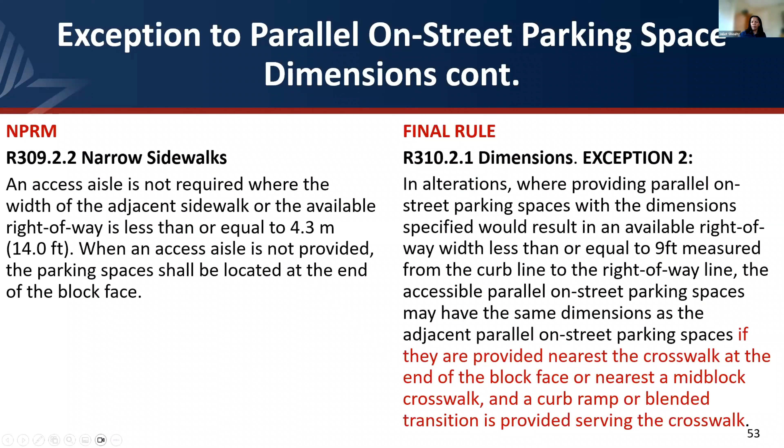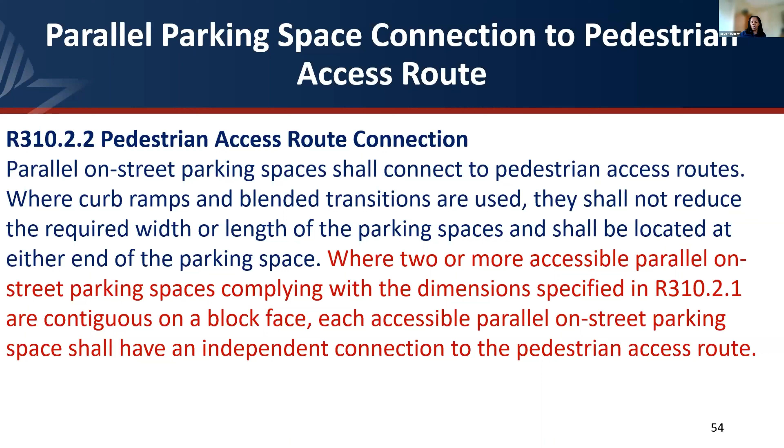Parallel parking spaces need to connect to a pedestrian access route. If you have two or more accessible parallel on-street parking spaces, they need to each have their own access to or connection to the pedestrian access route. So if you have adjacent parallel on-street parking spaces, one shouldn't have to go through the adjacent space to get to the sidewalk. So you need to have a connection to the pedestrian access route, an independent connection for each on-street parallel parking space.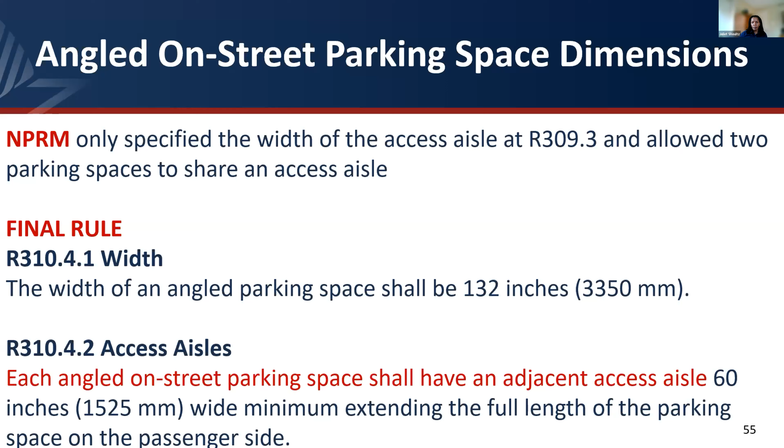We discussed this in advisory, but it's now explicitly stated in a provision. We did get rid of advisories - I forgot to mention that. So you will not see advisories anymore. Sometimes we found they could be helpful, but sometimes they were taken as the requirement. So we've gotten rid of advisories, and instead in the future we'll look to provide guidance. That way it's clear this is the rule text and the requirements, and the guidance is a separate document that helps you apply these requirements.

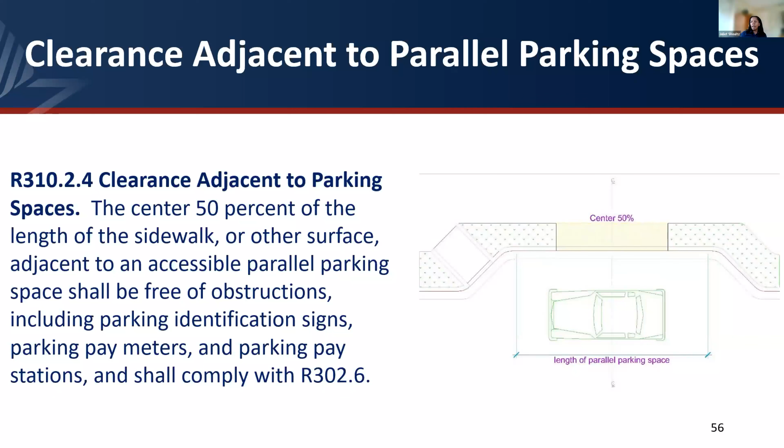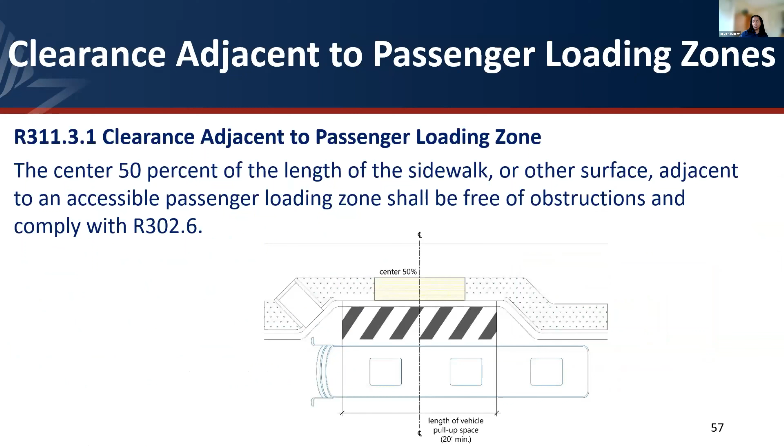The clear space adjacent to passenger loading zones has the same requirement. The center 50% adjacent to accessible passenger loading zones needs to be clear, similar to on-street parking spaces. In the proposed rule, we did have a requirement that you have signage at accessible passenger loading zones. We have removed that - there's no signage required at accessible passenger loading zones.

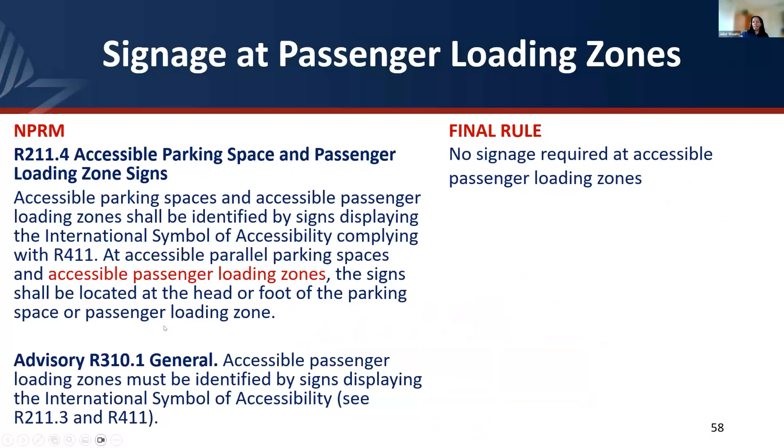So those are the main changes. There's a few other things I want to note, some other changes we made.

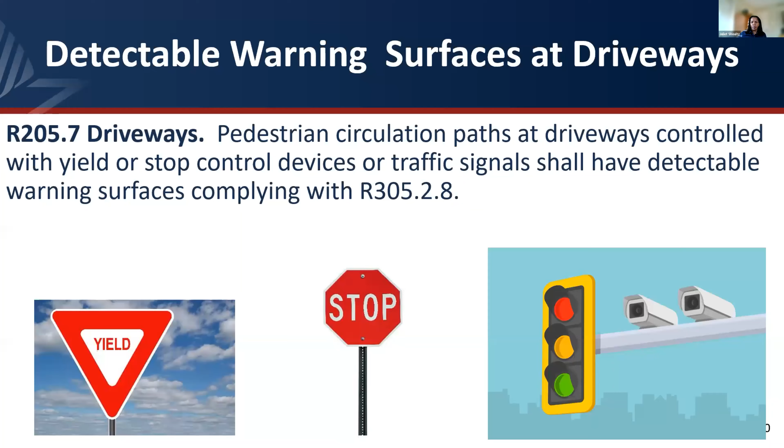We've added a new requirement for transit shelters and transit stops, for fare vending machines. If you do provide fare vending machines at transit stops or transit shelters, they need to be accessible. For things like vending machines, we've referenced ADAAG, because ADAAG already has the requirements for what an accessible fare vending machine is. That's where you see the citation to Appendix D, 36 CFR - that is ADAAG.

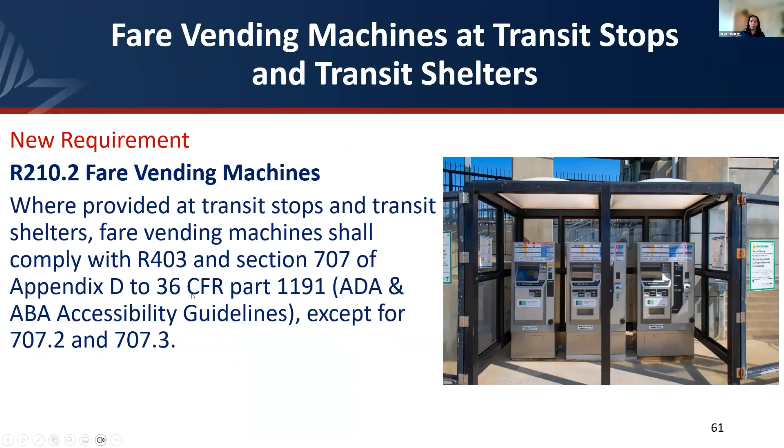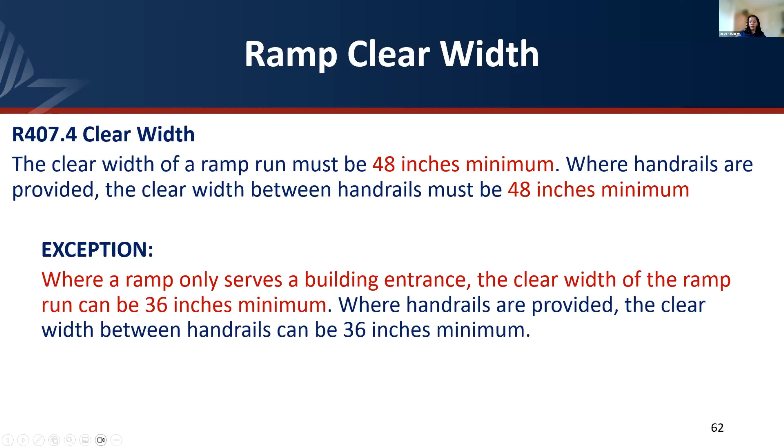We've clarified ramp clear width. In ADAAG, for buildings and sites, the minimum width for a ramp has always been 36 inches. In the final rule, we're clarifying that the clear width of a ramp run must be 48 inches minimum. If you provide handrails, the clear width between the handrails must be 48 inches minimum. The exception is that when the ramp only serves a building entrance, the clear width can be 36 inches minimum, consistent with ADAAG. So you'll have to look at what your ramp is serving to determine the minimum width.